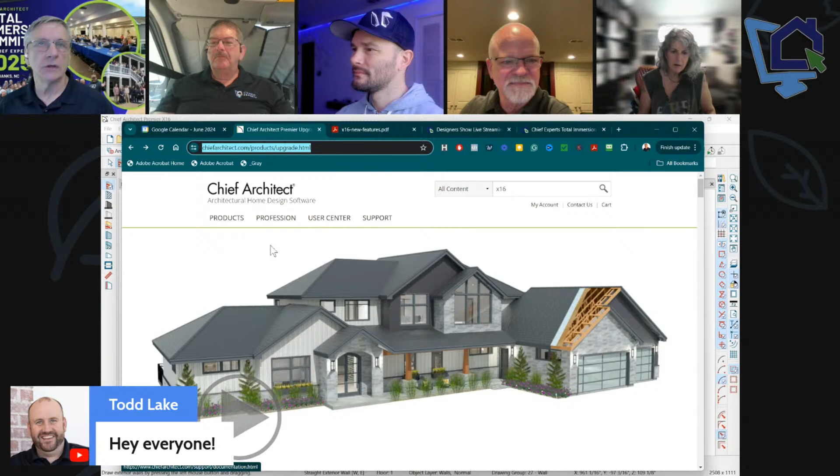And let's dive into this. So first of all, if you're on the show page, you'll see a link right below this video or this live stream where you can click to go to this page on Chief Architect's website, because you won't see this page yet on their homepage, not the X15 one, the X16. All you have to do is put in X16 up here in the search bar on Chief Architect's website, and you'll find the new features in X16 page.

And it's pretty typical, they do this every time. So you can scroll down this page, there's a little video at the top, it's a half-hour video that I think Takesha did, she always does a nice job on those. They go through it pretty quickly, so we're going to dive in a little bit deeper than that.

It's a good list, and there's some stuff that's really obvious what they've added. They've done some nice things here. Check this out, they always do a nice job putting this stuff together. Looks like they've even added little videos below these things, so this will be a place for you to come and find out more. But we're going to cover some of the highlights here today.

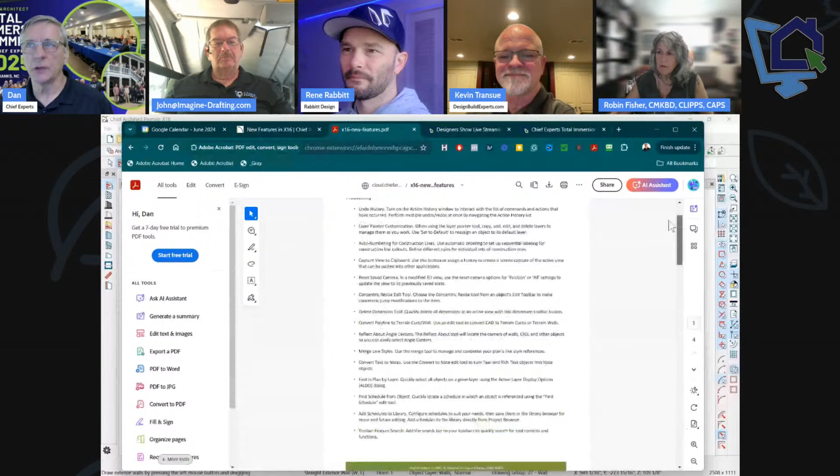The other thing you could do is right below this first item, you'll see a new features list. This is the PDF I've linked to that you can open, and it looks just like this. So here's your list of items in X16. It's 4 pages long. I've seen some of these come through with a lot more pages, so it seems like each version they're kind of tightening things up. Do you kind of see that, guys?

Of course, we won't get into the piss and moan session right now, as we always do when we get together, about how they didn't do this and they didn't do that. But they did a lot of good things, so that's what we're going to focus on here today. And they also do a lot of things they don't list, little bug fixes, little enhancements.

In our beta group, it's fun to try to find those little fixes and note what they did. They're tiny little things, but exactly, it feels like tightening it up. As I was going through this list, researching every piece they've listed here, I was finding lots of those little fixes too. We'll see some of those as we go through this.

So let's just start from the beginning. Undo history, what is that? I'm going to switch back and forth between that PDF and this. I've got a little plan started here that we can do some things with, and guys, feel free to chime in anytime you want.

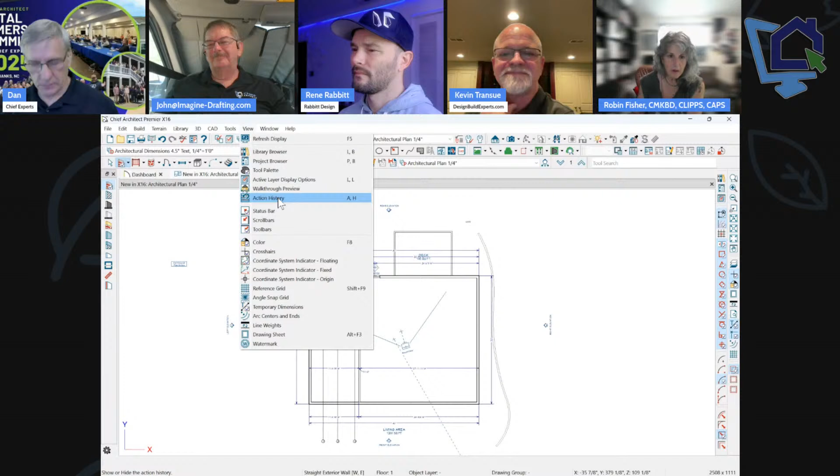It's under View, you've got a little thing here called Action History, and this is exactly what it says. When you perform an action, Chief is keeping a history of it. So you can open this sidebar, and as you do things in your plan, it's going to add it to the list, and you can just keep this list going and going. So this really becomes your undo list, if you want to go back to a point, like right here. So that sidebar is showing you what was just done, right?

You can't just delete that item, if there was that one thing you wanted to delete, and keep everything else? I don't know, I've never tried that. Everything above the thing you selected gets cancelled. Got it, okay, that makes sense.

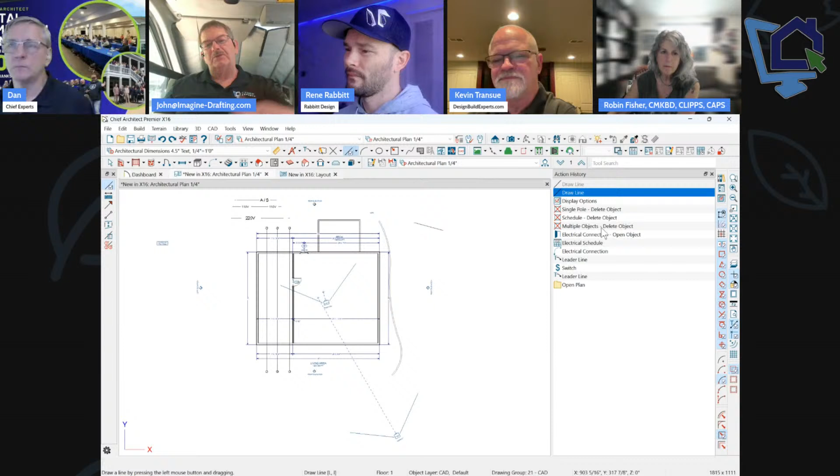And if you see that you selected something and went too far, you can go back up and select something higher, and it'll correct it to that point. The most current is at the top, the oldest is at the bottom. So if you click halfway down on there, Dan, everything above the line now is going to get deleted. But if you click on it again up higher, it'll restore things that are below it. Oh, that's actually really cool. Okay, so it's just moving things back and forward.

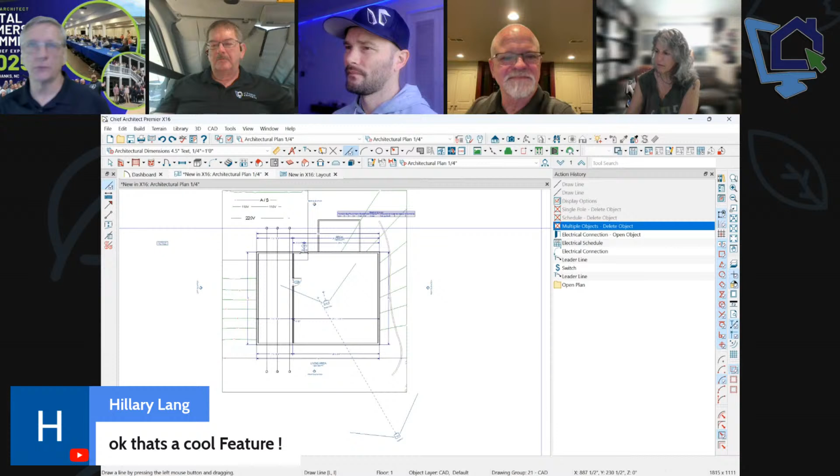I've noticed some things take a little longer than others. Well, think about how this works, it probably puts all of those in your memory and has to search through the memory of each of those. I don't know exactly how it works, but that's based on past experience. The thing about this, when you save and close your plan, the list goes away. It doesn't stay there forever, it's only there while you're working on your plan. So that's the action history list, and it works. That's kind of cool to see.

So let me ask you guys a question. You said if you go to a spot on the list, you delete everything above it? No, it doesn't delete it, it just undoes everything above it. It's just the undo function, right. You can't pick a single item to undo without affecting everything that happened afterward. So when I click this and hit undo, am I undoing just that item? No, you're undoing that and everything newer than that. When you click, you are performing that undo action.

But you can't. So it gives you a preview of what it's doing, what it's going to do if you keep going. You can't just undo the electrical connection. You have to undo everything that happened after that electrical connection, above it. So it's everything above it.

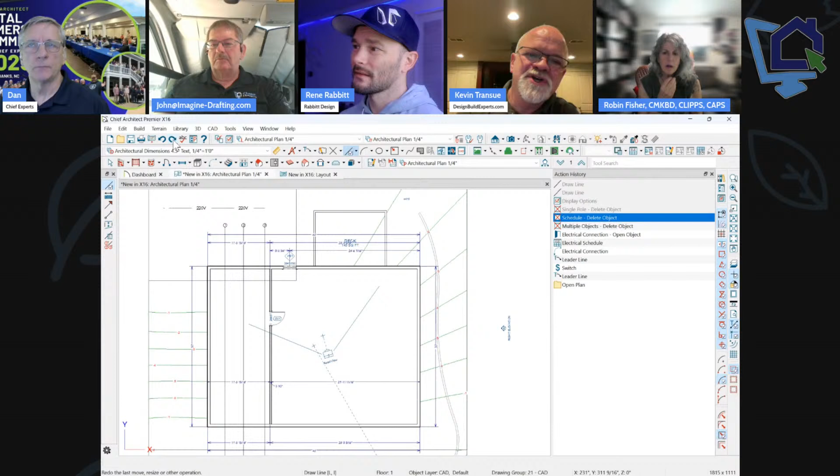Let's try something. Select what you have and then hit redo and see if it'll just go up one. Okay, yeah, oh there you go. That's really not doing anything other than selecting it. I know, it's like it's not undoing. Well, no, it's redoing. It's going up the stack, because you can watch it happening in the drawing.

Well, that's effectively doing exactly what we just said we probably couldn't do, right? Because it's taking the actions for each of those steps and redoing them on top of the action that was removed. Yeah, oh that's cool. I didn't know it.

Ethan, keep quiet, Ethan. This isn't a pissing and moaning session. Tuesday at 4 - I think if we go back to all hundred and however many of these sessions we've done, that's the first time one of our visitors has been called on the carpet. But it's Ethan, we can call it that anytime.

So, all right, let's move on here. Layer painter customization. So what is the layer painter, you might ask?

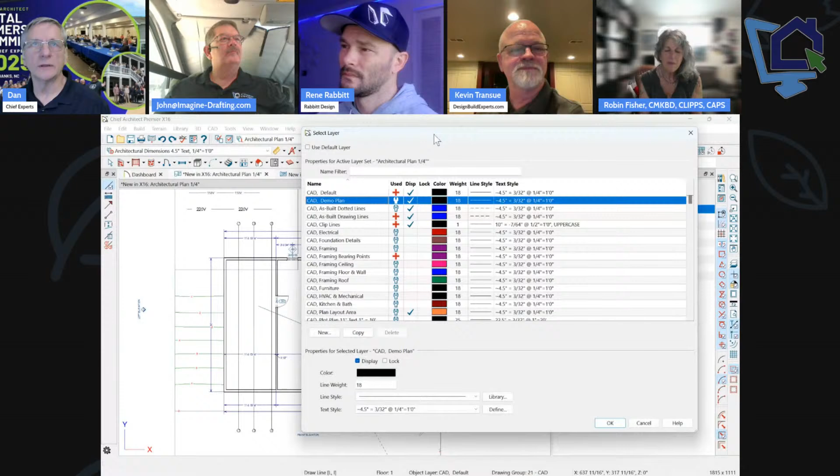I have that on my toolbar usually. I'm still using the Chief standard toolbar right now. Layer painter is under tools, layer setting, layer painter, and it is what it says it is. So what you could do is you can select a layer and paint it onto other items in your plan. Now in X15, we had none of this stuff.

This is not in this dialog in X15. All you could do is pick a layer. In this version now, you can not only pick a layer, but you can add a layer, change a layer, do whatever you want to the layer. And then once you select it, if I want to put something on a framing layer, I could click OK and then just paint things, and it's going to put it on that framing layer.

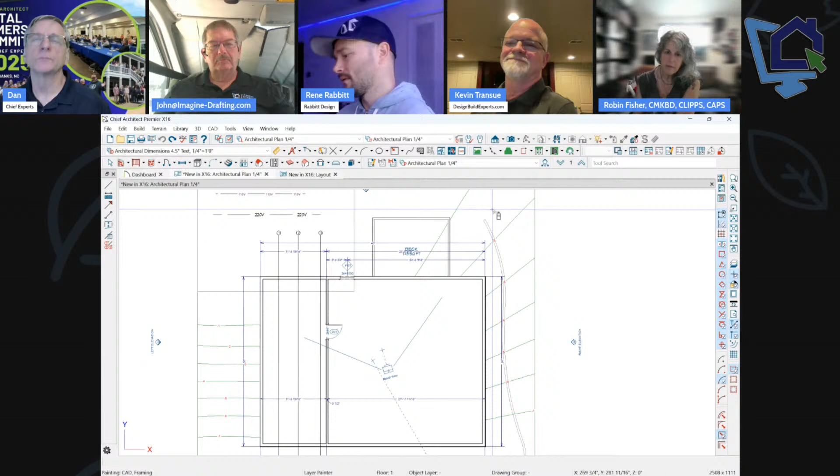So that's what that does. It's really a nice tool. Again, I usually add those to my custom toolbar. I'll give you a great use case - it just came up the other day. You've got fixtures, all kinds of fixtures, and then someone wants to make a plumbing connection plan. So they use the layer painter to paint just those fixtures that are supposed to be on some kind of unique plumbing fixture layer. And then they're just spraying the fixtures they needed on that plumbing plan. That's another place where I use that layer painter tool quite a bit.

In fact, let me change mine to my toolbar. So I actually have those tools on my custom toolbar - I'm not like Rene, I keep my custom toolbar pretty simple. That's about all I ever add to a toolbar: layer hider, layer painter, layer eyedropper.

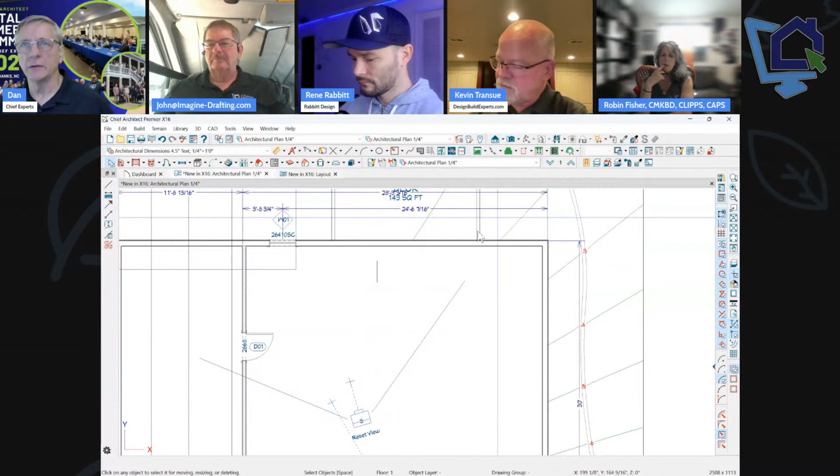So when I draw a CAD line that I'm dimensioning to, and I want that to be on the same layer as the dimension, I'm going to go layer eyedropper, pick my dimension, and paint it onto that line. So now that line is part of my dimensions because I've painted it on there. So that's just what Rene was talking about too. Very nice tool.

All right, so that's nice to be able to customize what it is you're going to spray on something. It's kind of like a material picker - you pick a material, you're going to spray it on things or click it onto things, I guess.

All right, next item was auto numbering for construction lines. You guys use construction lines? Yep, these things. Yeah, numbers. This is pretty cool what they've done.

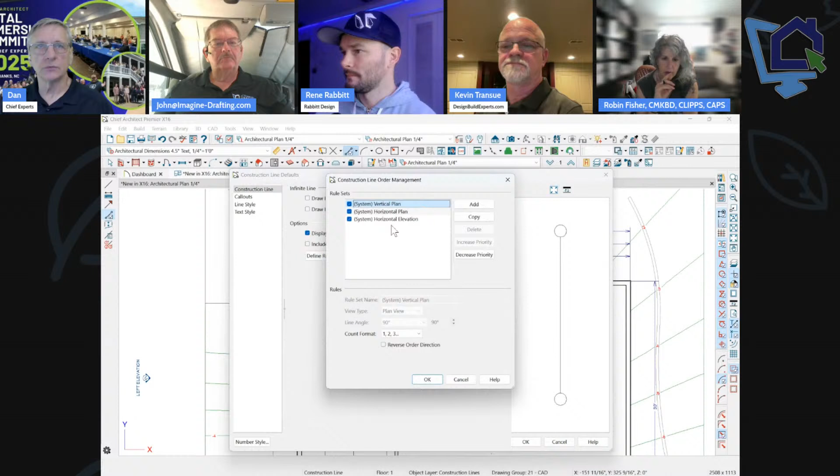So what you could do is you go to - let's see, double click under the line tool - is your construction line option right here. You could double click on that, or you could go to the layer icon, and you can then define and set some of the rules right there. So you want to define your rules. This is pretty cool. So they come with 3 rules already. You could add more if you want.

We want to go and change those verticals to ABC. You can change those, but what you want to do is include automatic ordering. That's what we want to do. And then for callouts, check that as automatic as well.

I wonder why it doesn't... well, actually this is my template, so maybe mine is set up automatic for that. Chief was already... did you use Chief's template? I don't know if the one that comes with Chief has it set up automatic or not, but anyway, you have to set those two settings to make it automatic.

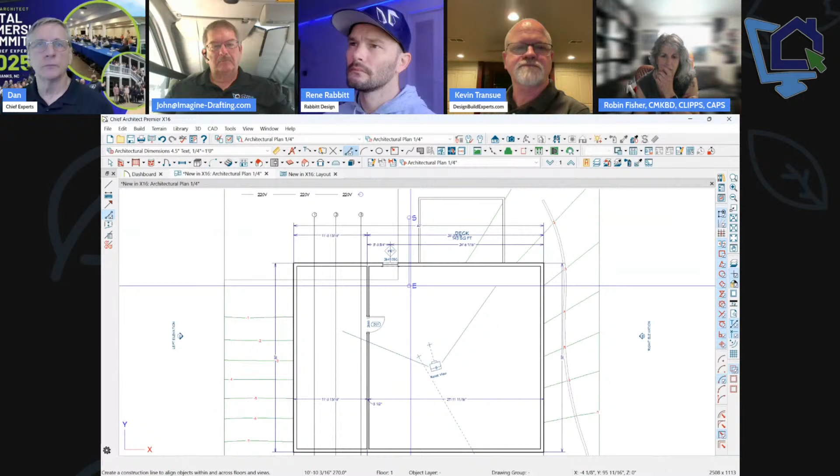And then when you bring that up in a cross section, that's what's pretty cool about these things. When we do our cross sections through here, we're going to see our construction lines where those cross sections are, which correlates to the floor plan. It can be a little confusing when the construction lines extend past the screen image, because the callouts will end up at the top and bottom of the screen or lay over the top of your drawing, which is crazy, but it's actually cool because you can always see the label no matter what you're doing. As you pan or zoom, they take their rightful positions where they belong.

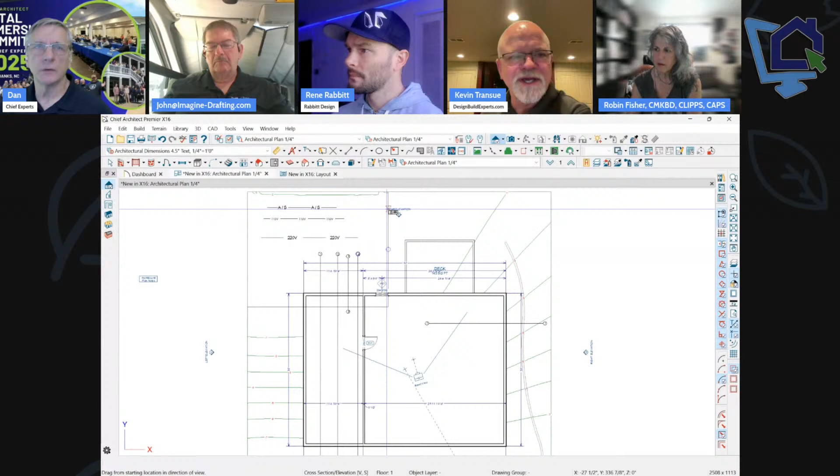Yeah. You guys use these a lot? I don't use them a lot. I do, when I need them. Yeah, when I need them, they're really nice. Now that they're automatically labeled, that would be even extra nice.

Okay, so this is an interior design question. I don't use them - why would I use them?

How do you use them? Oftentimes when I'm talking to a builder or a client and we're looking at the screen and they say move that door, and I go, what door? And it's in between grid line 1 and 2, and A and B. You can reference positions on your drawing to someone you're communicating with very easily. It's sort of like playing Battleship when you were a kid - you can just reference the position. That's a great one.

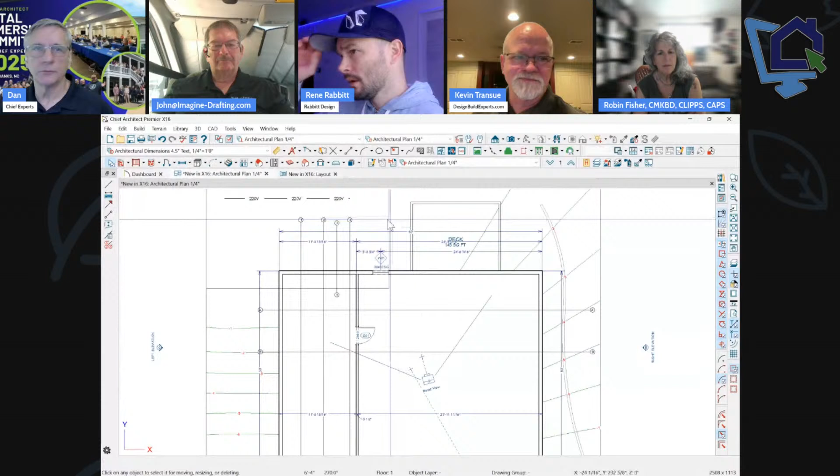I also use it to note bearing lines to my engineer - just makes it really easy, quick and simple. Part of it depends on the complexity of your plan. If you've got a super duper simple plan, no big deal. But in this kind of a case, you could take an elevation and say, yep, we're going to move that door between A and B in that elevation view. You could set up different standards for elevation than plan, although I'm not sure you'd want to. And then you can also set up standards for diagonal lines - new rule sets for diagonal lines too. Isn't it just 45 degrees? No, it's multiple different degrees. Oh, really? Okay.

Cool, Robin got removed - I don't know why. She didn't like our answer, huh? She got put in timeout. Sorry, I didn't even hear it - I had internet issues, so I didn't hear your answer, but I'll go back and listen later.

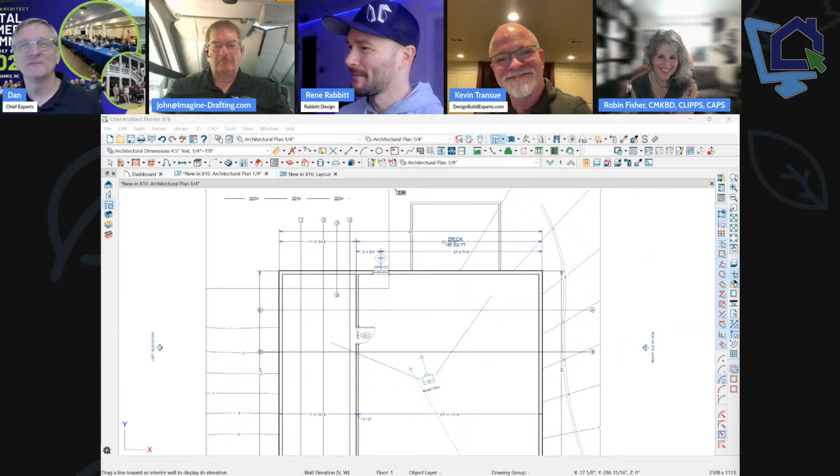All right, next up on our list was capture view to clipboard. This is kind of like, okay, well why would you want to do that? It's not even on any pulldown menu - I couldn't find it. Is it in the 3D menu? Capture the screen - if it is, I didn't see it. No, I have it on my toolbars now - you have to add it to your toolbar. If you wanted to add it to your toolbar, you would go to tools, toolbars and hotkeys, customize hotkeys and toolbars, then search for it.

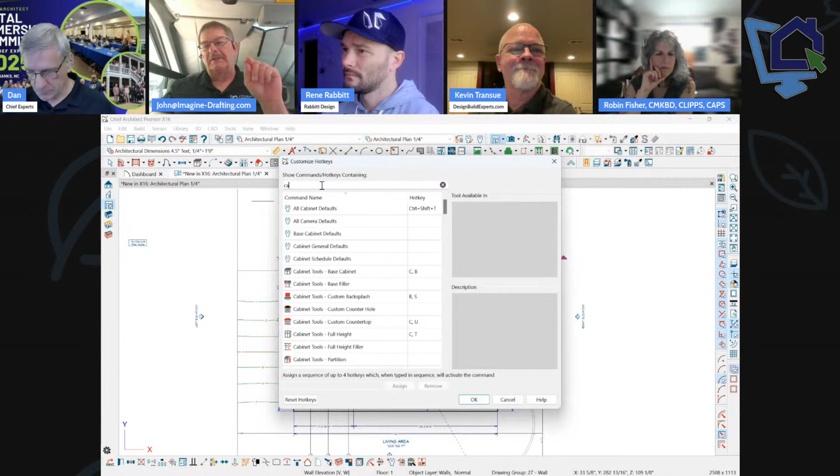Just a second, Norman. This is the answer to your question. Go ahead, Dan. And then I would add that to my toolbar.

Pull that up, you're under hotkeys. Wrong place, sorry - Tools, toolbar hotkeys, and customize toolbars. Now I would search for capture, and then pull this up onto my custom toolbar, right on top of the icons. And there it is, so now it's on my toolbar.

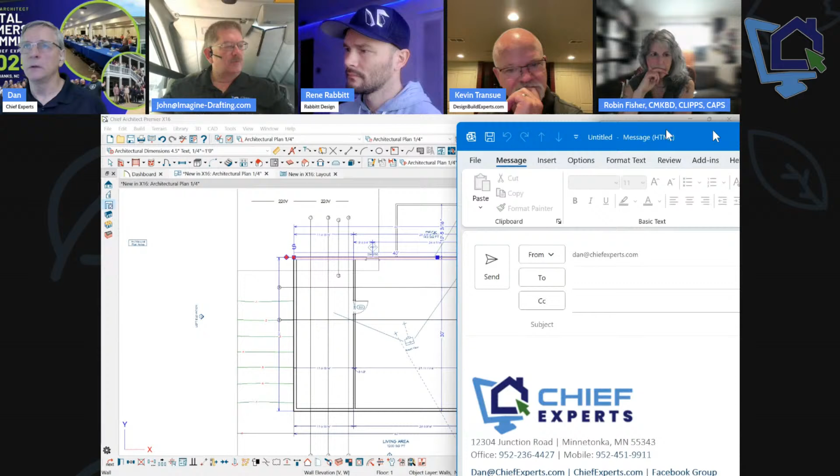So now when I click that, I can have things highlighted on my screen. The thing that's different than other screen captures is you're only capturing the actual screen of the drawing, not all the icons and everything else on your screen. And if you have stuff highlighted, you're capturing that. You could paste it in an email or a Word doc - I could just go to my email now and paste that screen capture right into there, and there you go.

I do find it funny that it includes the XY indicator. It sure does - well, I guess if you're looking at the plan, maybe you want to know what that is. As a point of reference, Dan, in a previous communication you said this is different from the way the Mac and PC work by default. The Mac does do this by default; I have no idea about PC because I don't have one. It just captures the screen, not all the icons and everything. Well, you can do it either way.

So can you try something for me? I haven't had a chance to try this yet. Can you open up a dialog for something - click on a wall or something, open the dialog, and see if that screen capture is still available? No, because I won't be able to click on it when there's a dialog open - I can't click on that icon now. Some kind of manual is needed, yeah, they need something for that.

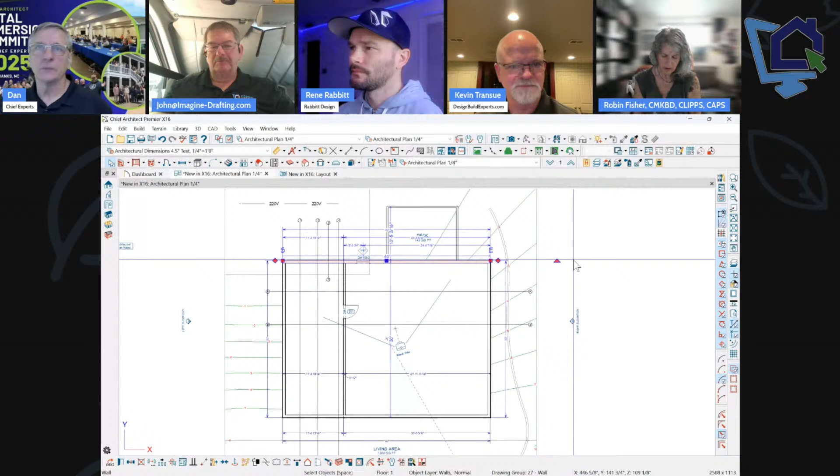So that's where you're going to use your Snagit or your print screen icon. You've got the print screen on your keyboard - you could click and that'll capture the whole screen. Print screen, or Windows Shift S.

Norman, go ahead - when you grab an icon and put it on your toolbar, you want to make sure you put it on top of another tool icon. Otherwise, you're going to create a separate toolbar, and you'll end up with all these little separate toolbars. So put it on top of something, and that way you'll have it in one big block of tools. Look, you see the dots in front of these different toolbars - when you set icons on top of icons, it adds it to that same toolbar, called a block of tools. It not only adds it to the same place, it adds it following the icon you clicked on - it's positioned in that toolbar right at that point.

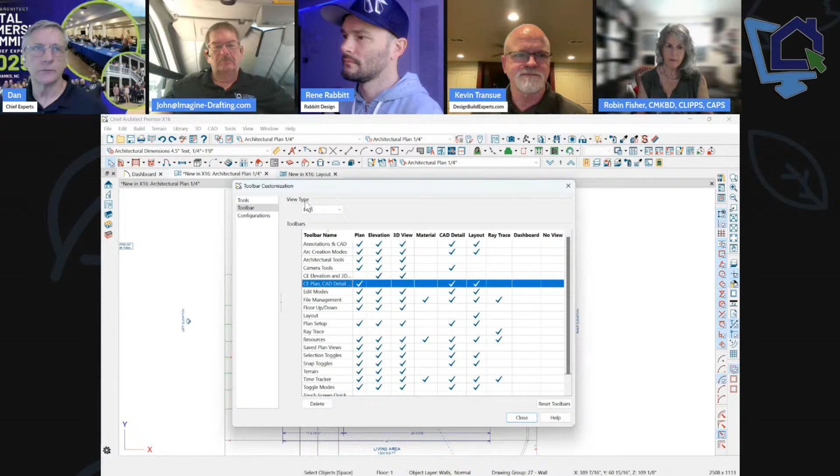And you don't need to only customize your custom toolbars - you can customize any toolbar, and take things out that you never use. What you can also do is, if you've created a little toolbar and want it on different views you work with - CAD details, floor plans, 3Ds, layout pages - you can turn those on and off on those different kinds of views. That's under the toolbar customization toolbar - that's what this whole chart's all about.

As long as we're still on that topic, if you are space constrained like me and work primarily on a MacBook or notebook, you can set up different tool configurations based on the type of work you're currently doing and swap between those. That's where that little chart comes in that Dan just showed, because something might be relevant to 3 or 4 of your different configurations but not the rest - so you can tell it this toolbar appears here, but not there.

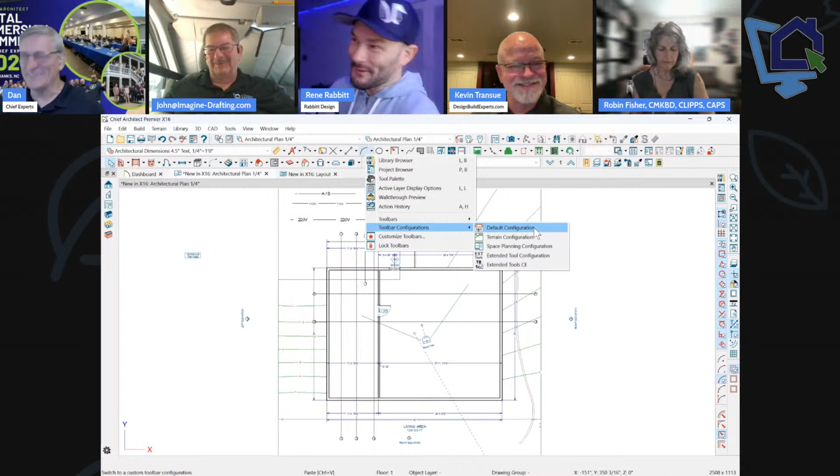And wouldn't it be nice if someone had ever made a suggestion that if you switch to your electrical saved plan view, it switched to an electrical toolbar configuration? Wouldn't that be nice? But come on, everyone here, go make that suggestion right now, please. Okay, all right, cool.

Notice I didn't say anything badly because it's a good suggestion. Let's go, everybody go vote on that one.

So when you right click on any icon, you can go to the toolbar configurations, and here they are. If you customize your toolbars, you can take a configuration, copy it, and then customize that one. So you could basically have a whole bunch of different toolbars that you could switch between.

And yes, it would be nice if you could tie that into your plan view, so that when you switch to a layer, when you switch to an electrical view, it brings up all your electrical items. That's a really great idea, Rene. Everybody get on that, will you?

Okay, we only got an hour. We got to keep moving here, guys.

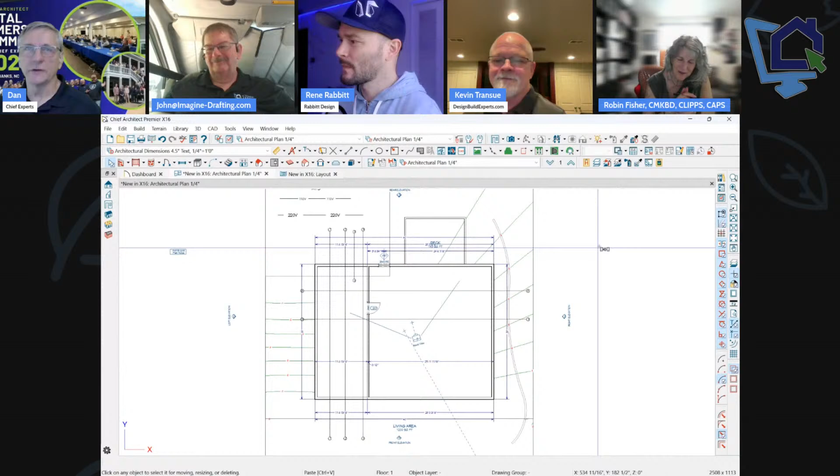Reset saved camera view. Have you ever gone to a layout page and double clicked on your view to open it, forgot it was on a layout page, and switched it around like this, and you go, oh dang it, now I have to go redo it on my layout page? I haven't done that since yesterday, but yeah.

But now, under the reset saved camera view, it's under the 3D menu, under view direction, and it says restore original view. It'll set it back to where it was before you made all those movements.

That's a good one. I like that one, because I do that all the time, just like Kevin was saying. You could do that in X15 too, if you didn't save the camera after you did it.

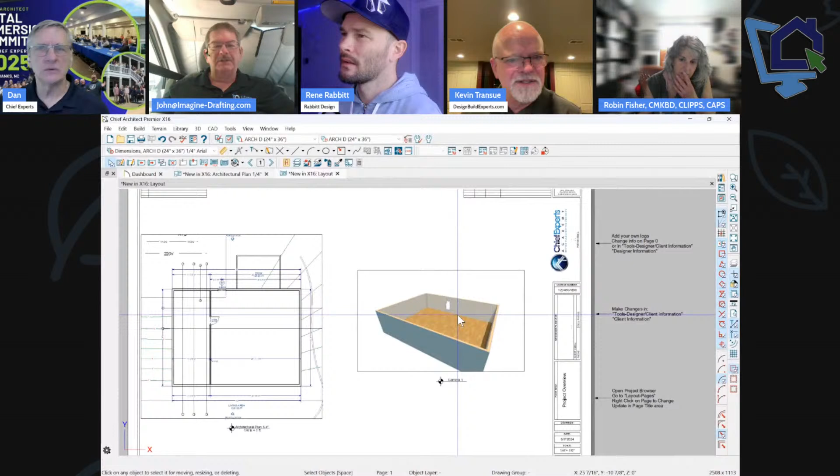Did it really not save that position? It wouldn't save that position. It would not even update on a layout. I'd never experienced that. I guess it never would really update on a layout until you saved it. I thought once I moved it, I was done.

Nope, that's the way it used to be. That's the way it used to be. Okay, anyway, that one's a nice little one. Reset, resize, or reset your saved camera views.

Concentric resize: if you have something that you need to resize concentrically, Chief has added that icon on the edit toolbar now. That's nice because we always had to click on this one and then open its dialog, but now this allows you to just click on it.

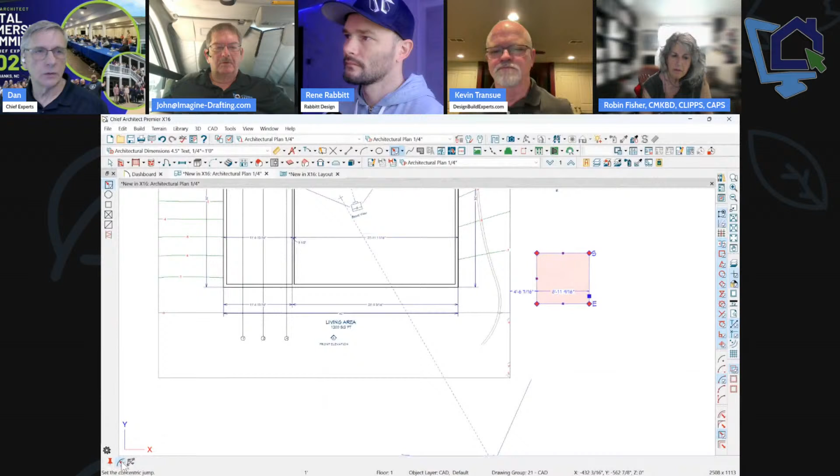Now I could just pull on it and resize it concentrically, or I could set a jump by clicking over here and setting the jump distance I want for my concentric resize. So when I do that and click on it, now it's jumping every 24 inches.

So you've got all of these other settings, actually where do they go? Now, when you're changing the jump distance, is that changing the entire plan's jump distance? So if you were to go concentrically resize a window, is it going to jump by 24 inches? I haven't checked that one yet.

Let's go find out. So if I click on a window and I'm grabbing this, yes. So it's the same as it used to be, where once you set that, you're going to have to go back and reset it back to 0.

This is one of my suggestions that they brought through, but I wish it was independent. It should be independent. It should just be part of this tool and not the whole darn program. And that stems from up here under your CAD, the general CAD.

Let's see, where do they actually put that again? No, I forget. Preferences, that's right, preferences, I forgot. That's part of this, yeah, right, you're here, there, yep, this jump distance.

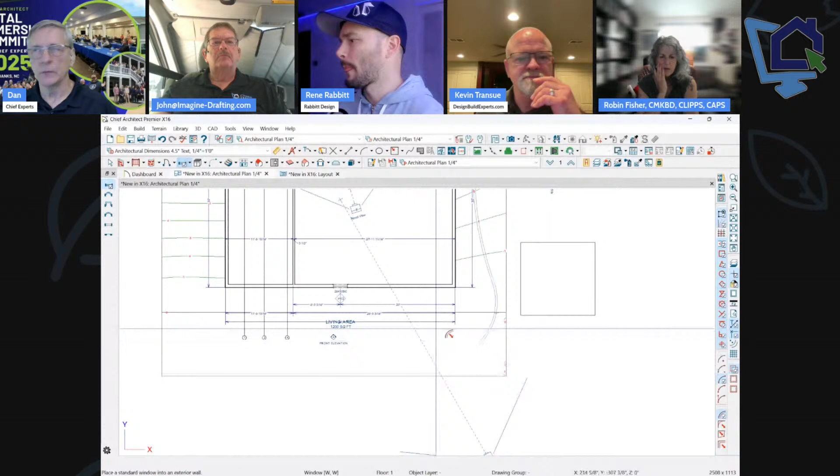So once you set it... that's interesting, it doesn't show 24 there. Did you change it to 0? I changed it back to 0. Okay, so it left it checked as concentric, so it's still doing it.

So if I move that window now, yeah, see, that's not what it's supposed to do. It's only supposed to move an edge. So you actually have to go back in here. You can't even turn it off here. So now how do we go turn the concentric off?

It goes off automatically, doesn't it? It didn't, no, it stays attached. It did not. It's set to 0, but when I resize that window, it's still resizing concentrically.

Now you got to go back to the edit menu. So now you actually have to go back to this one, or maybe it's because I have that one selected. That's probably why it's doing it. Yeah, it was operator error.

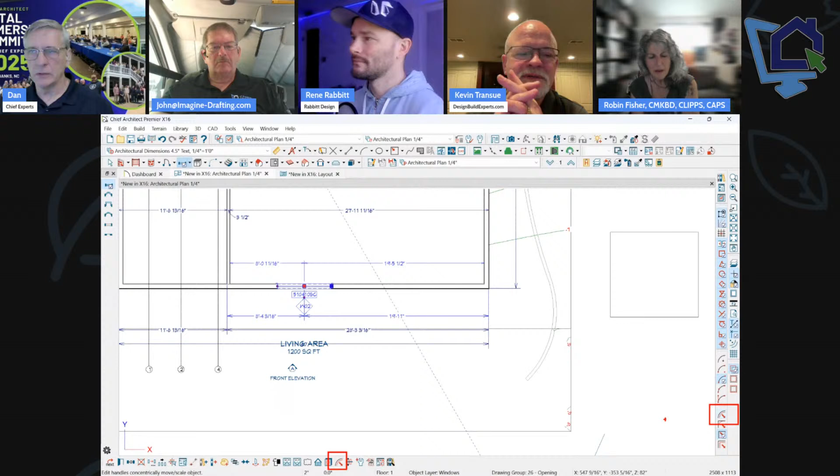So at least this has been detached from this, so if I'm doing it from here, it's not keeping it locked on concentric. Mike brings up something that I do, which is: will you concentrically resize that window again without a jump distance? Oh okay, set it to 0.

Hold your C key, or comma, in this instance. Let go of the C or comma and then hit tab or enter while you're dragging. Start concentrically resizing this.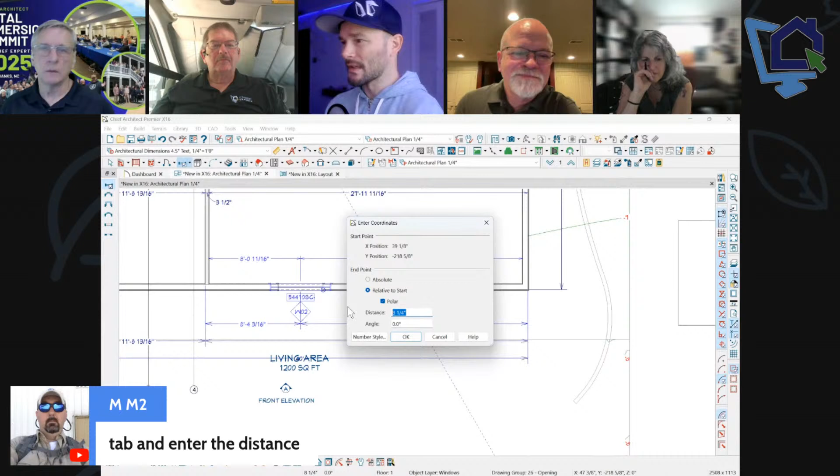Now let go of the concentric, but don't let go of that. Check polar and then set this to 6 inches. Now we've resized the whole window. You've completely forgotten why you were resizing the window, but you got it resized. That's what I do, same thing Mike does.

Okay, let's move on. Delete dimension tool. This little icon right here will delete all your dimensions for the plan view you're on right now.

If you have auto dimensions turned on, it's going to turn it off for all of your plan views. Why all of them? Why not just the one I'm on? Now I'm complaining a little bit, but anyway, I'll have to click yes, and now I don't have any auto dimensioning going on. I'll have to reset that, which is fine.

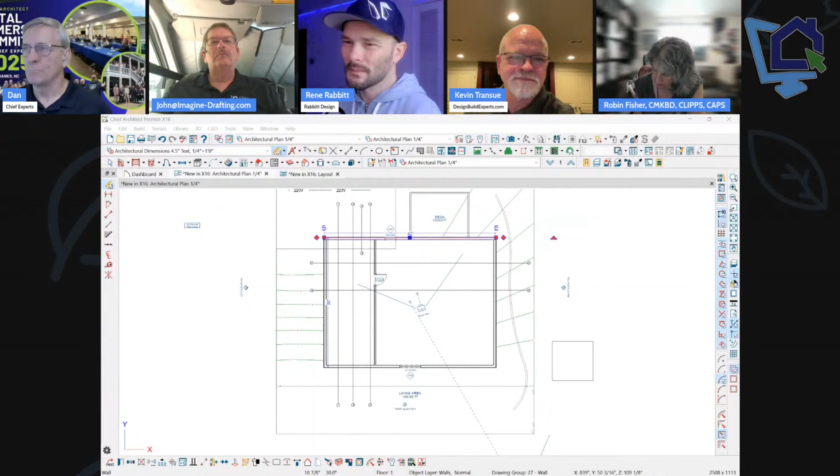The other way to do that, which I've always taught for years, is to highlight any ruler icon and draw a marquee and then hit delete. Same kind of deal, but now we have an icon to delete all our dimensions. It's really great if you're just working through some templating or setting up dimension defaults.

It's very helpful. Does it delete all dimensions or just those currently shown? Good question. They'll still be there for your other plan views. So if I have dimensions here in this plan view and I go back to this plan view and hit delete dimensions, it will only delete the dimensions for that plan view.

Even if they're auto dimensions? Because you made a comment that if they were auto dimensions, it deletes everything from all your drawings. Did it delete all of them? Well, you said that comment. Okay, so I got some on my half inch. Oh, that's because these are on the same layer, probably.

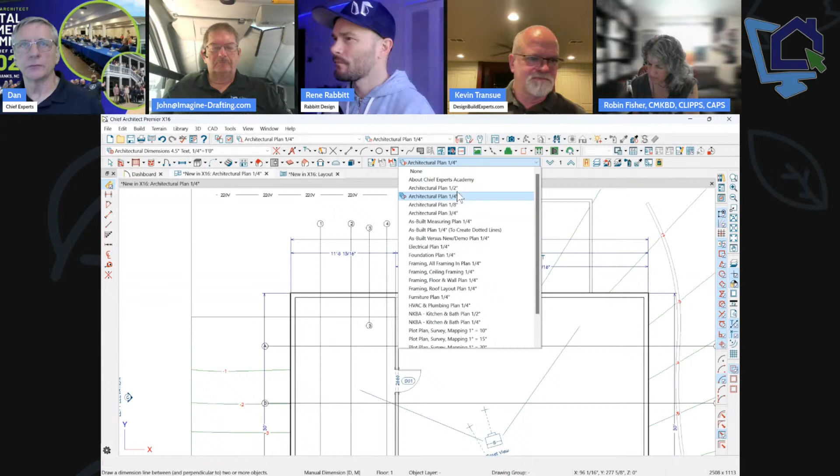Let's go to my electrical plan and add some, and now let's go delete these. Go back to that. Okay, yeah, just the plan view you're on. That's the way I have my template set up. These are all using the same layer, so that's why that did that.

Convert polyline to terrain, curb, or wall. That's one of the tools they've added. So if you draw a line somewhere and make an arc, make it whatever you want, you can convert that now using the Magic Wand tool, the convert tool, to whatever you want. Notice they've changed this dialog a fair amount, so it's more scrolly-poly, and I'd assume that's because they're going to add more things to it.

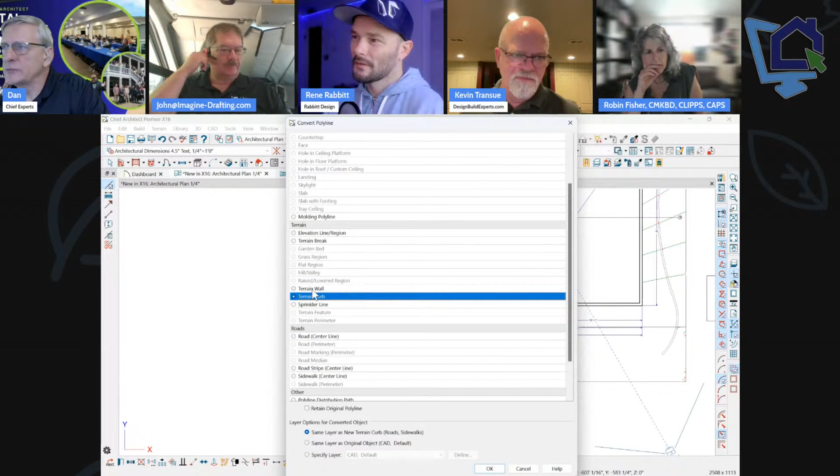But we have our whole terrain. It's nice they've broken it down a little better. I could make that a terrain wall or terrain curb and have it follow the terrain. I haven't played with the terrain wall thing much. Have you done that? Will you do it? I'll show you a trick on this that I like. So do the terrain. Oh sure, I did the terrain curb.

Convert this back to plain polyline.

Okay, so we'll go back here and click on this tool and select plain polyline. They got rid of the icon that switches it to plain polyline, so now you have to just go in here and click OK. Now it's a plain polyline again, so press OK.

So here's what I like. Notice now it's a square, a rectangle. So you can take a single line, make a really organic shape, and if you needed it to be a closed rectangle of some size, you could convert it to a terrain wall, then convert it back. That's the same kind of deal. So once it's converted, if you needed to model something that was a solid with an edge like that, this is a really fast way of doing it.

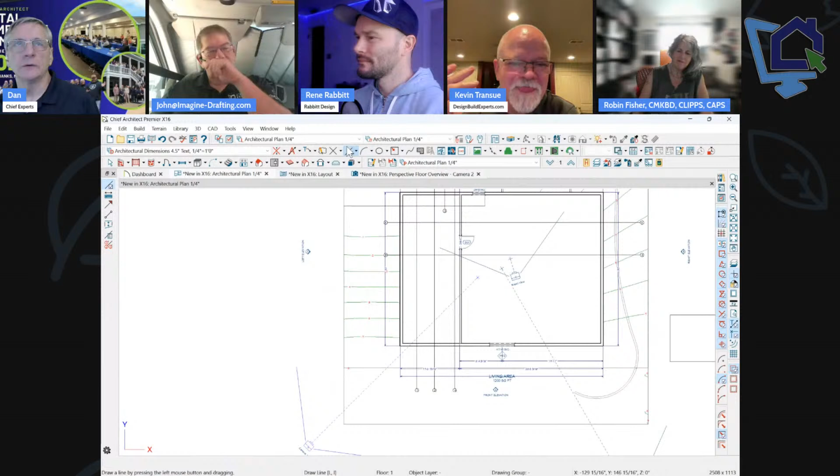Or you could use it to do what it's supposed to do, which is make a terrain curb. But I haven't played with the terrain wall function that much, so that's a really great idea. If you're taking a line and breaking it and doing all sorts of crazy stuff with it—again, I'm just holding my right mouse button down to bend it like this—then I convert that to a wall or a curb.

Going to make it into a box, and make the width huge or something. Yeah, I could make the width bigger if I wanted to. And now, if that's the shape I need it to be for something else in my plan, I just make it back into a plain line.

Or you could even convert it to solid right from here. That's cool. I could convert it to any of the things that are highlighted there. But there you go, so that's pretty cool.

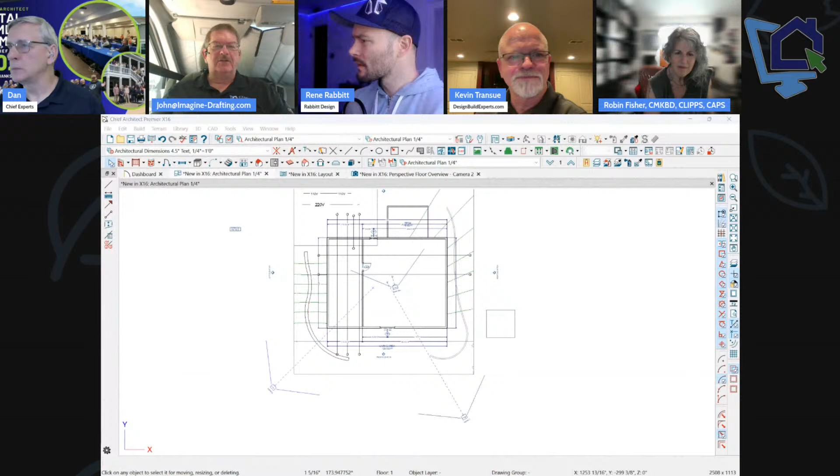Did anybody else catch that technical term that Dan just created? Yeah, I did—besides me and Norman? I'm glad Norman pulled that up because I was at 'roly-poly.' Roly-poly, yeah. That's like my term for refreshing the 3D. You got to jiggle something.

Brady says, where is the clipboard things are sent to? That's your system's clipboard, Mac OS or PC. Hey Mark, what's the keystroke to see that hierarchy or list of things on a PC? If you turned clipboard history on, then it's the Windows button plus V as in Victor.

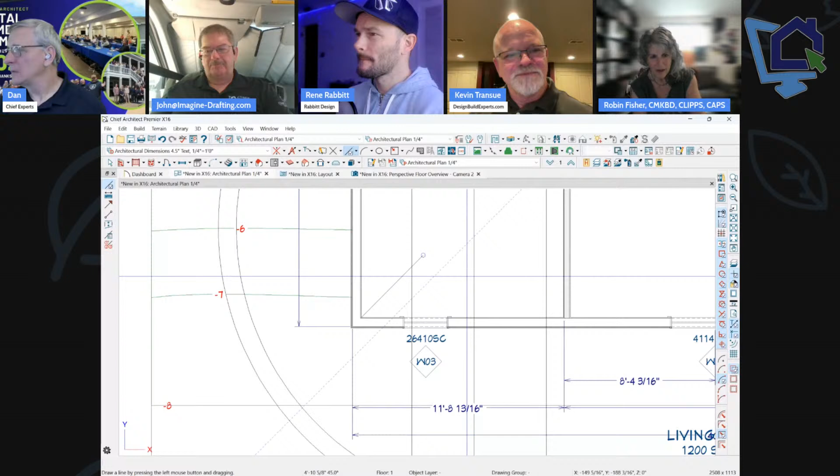Okay, so whenever I wanted to reflect something about an angle, I always had to draw a CAD line. Oh, this is my favorite one. All of them. And I could hit my reflect—I could hit copy and reflect about, and then I could click on that line. Well, we don't need the line anymore.

So Chief has made it so that they're going to snap to that corner. So I could hit copy, and now I could hit reflect. Now I could just click on that corner, and I get my reflect without drawing that line. So it saves me a step—that's kind of cool.

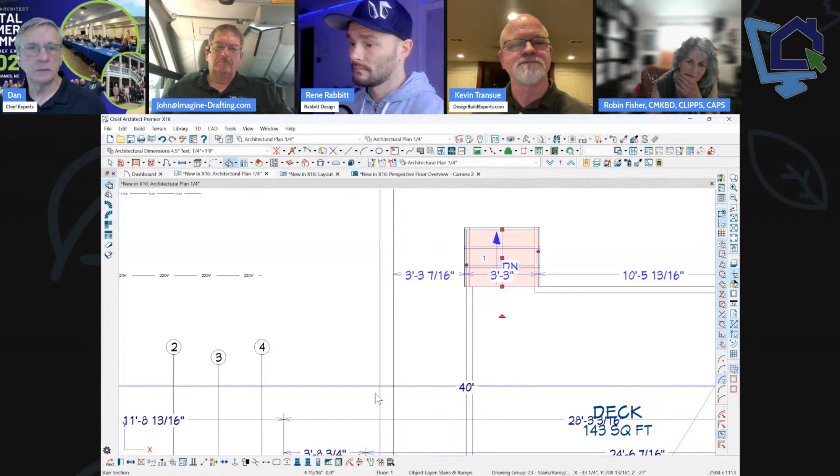So if you're doing steps on the edge, that's what you want to have. I'm going to snap that to the corner of my deck, and then I'm going to click copy, reflect that around, get on that corner. Come on, it's really touchy though—sometimes I might have to draw a line if I'm away from this corner. Yeah, pull your stairs—there you go, there it is, so there I got it. So you've got to get on the corner.

Can I share mine real quick? Yeah, go ahead, I'll show why I love this one so much. So here we go, I'm in 3D view—I like to work in 3D view a lot. So I've got a roof plane here, just a single roof plane, and it's easy for me to copy, reflect about, pick that corner up. You have to be a little bit precise with it.

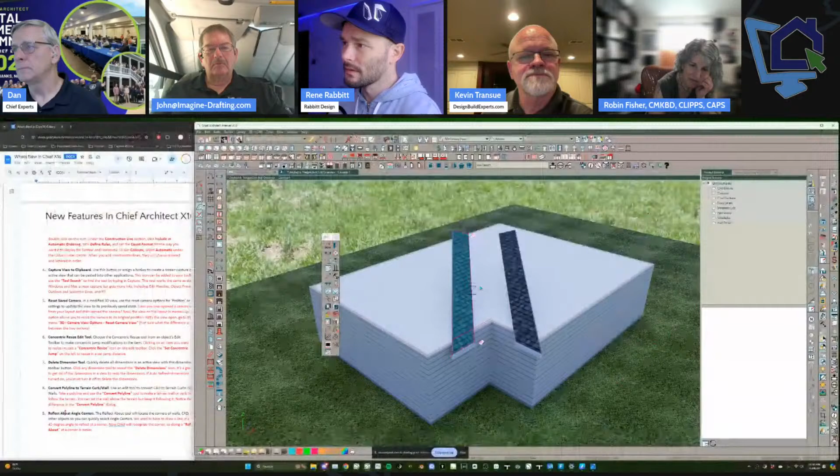So that's a little finicky, but once you've got that, then I can use the join roof planes tool and join these two. Done, right? Look at that—you don't need to be perfect, right? So it can just keep coming around this corner like this, do that same thing, make sure the selected edge handle is this one, join the two roof planes. Look at you guys, that's worth the price of admission right there.

Yeah, jeez, so you're just building that roof out real fast. That's such a big one to me. Yeah, I use reflect a lot. That's going to save me a few extra minutes not having to draw lines. But yeah, reflect is one of those really, really nice tools in Chief.

Reflect about—all right, on CAD boxes too. CAD, yeah, boxes. I mean, it should work on anything, anything that's got a corner on it, right? Yes.

It's fabulous. I've been using that. It makes life a lot easier.

All right, merge line styles. We're up to number 10 out of 50. We're not going very fast, we're going to have to do another show, but we're covering a lot of great stuff. The fun thing I like about what we do is we talk about alternative ways to do things and use things, and some reasoning why you need it and why you don't. I really enjoy that part of our conversations.

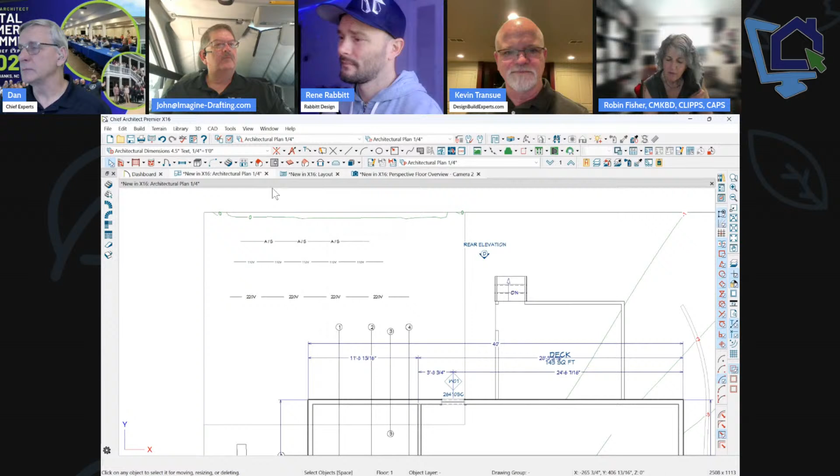The next thing is merge line styles. I don't know why I would ever use this, but maybe Rene has, or one of you guys has a reason why. Say you have some different line styles and you want to merge them into one line style. I don't even know what that means. Well, you can go to your CAD tools, go to lines, and there's a line style management tool.

What Chief will do is you could click the used icon here. That'll sort your list out, and you can see the lines that you've used in your plan. So let's say, you know what, I just want all those to be one line style, so I'm just going to merge those all together, like merging layers. Now those will all be the same line style.

How did it pick which one it was going to? It was probably on the top of the list. So let's go look at that real quick. Do your do action, CAD, lines, line style management, sort by that. I don't know that I can move them, but yeah, that was the one on the top of the list.

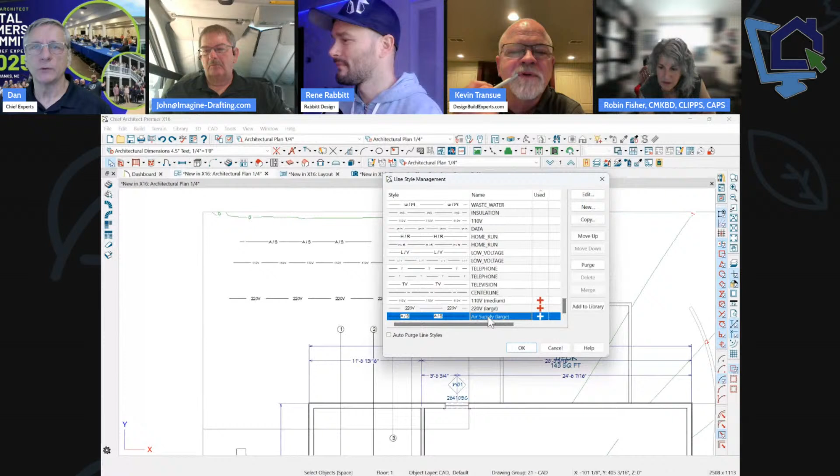Move something. Oh, move something. Completely changed the sort order. You dropped them down. So let's try this, let's see if it converts it to the center line. If I merge them... yeah, it did. Looks like it did, so whatever's on the top of the list.

I want 220 volt center lines. Well, go ahead, I think we should mix the water and the electric ones together. Yeah, and water and gas, gas and electric would be a good mix. I wish I could merge Kevin and Robin together.

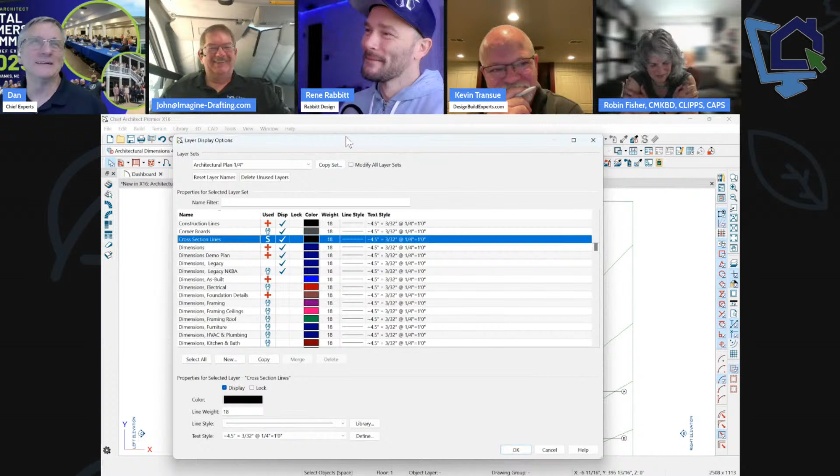I didn't see this on the list, but they did add this. Was this an X16? The ability to merge layers? No, that's in previous versions. It was. Okay, that's why I didn't see it on the list then. I guess I'd never really noticed it before.

So if you have things on different layers and you want to put them on one layer, you could select them and merge them into one. That's really great if you happen to have made copies of the same thing and your lines are on the same line and you're like, oh, what a mess. Yeah, it's an easy way to clean up your things.

The next one's really a good one. Let's skip the next one and go to 12, then we'll come back to 11. Let me do something here, same topic. Let me turn off all these goofy lines I have on my plan. Wait, you're gonna mix? Okay, you're gonna work on that. Okay, yeah, all right, I got it.

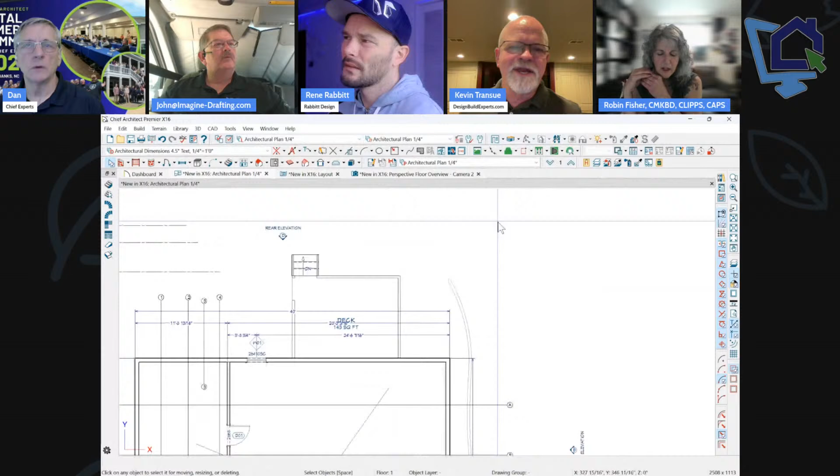So whenever you type text in your plan... no, we're gonna skip that one. Go to the next one, and then we'll come back. What, find in plan by layer? Yeah, because it's kind of in that same realm.

Oh okay, sorry. So if I go to my layers, actually I have to use the side panel for this because I didn't see that in that panel. So if I go to my layers over here and turn on all my tools, unless I'm missing something, I didn't find that item there. So if I go to display and I search, look for the plus sign, to be used if you...

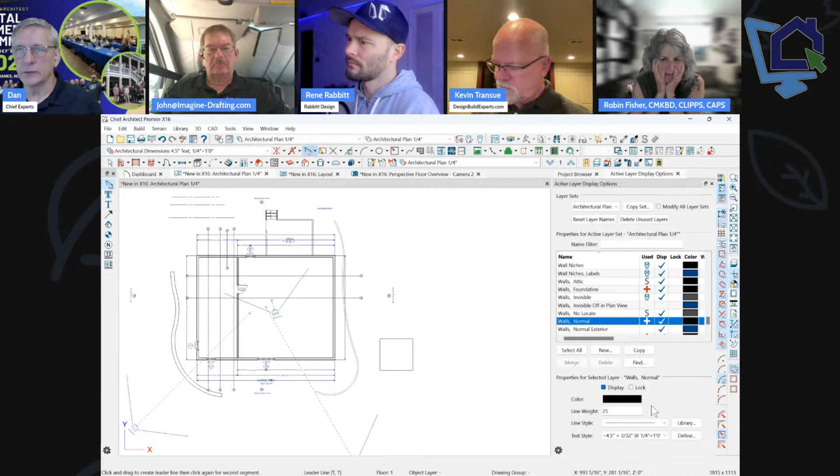Yeah, so let's just do it like this. Let's go to my names, let's go to my walls. So I've got a bunch of walls. Walls normal, where'd they go? Okay, so I could find all those walls on that layer in my plan. And which plan?

The floor, hit select, now I've just selected all the items on that layer. If you've got some custom layer you can't delete and don't know why, and you're trying to find it, and it's hidden inside of a CAD block that's inside of a CAD block, this will find it.

That's really wonderful. I'm curious why they didn't put that on this menu here too. Oh yeah, they didn't put it in the layer display options. Yeah, they must have forgotten about it here. It's only in Active Layer Display Options, only in the right side panel. Yeah, I do like that one.

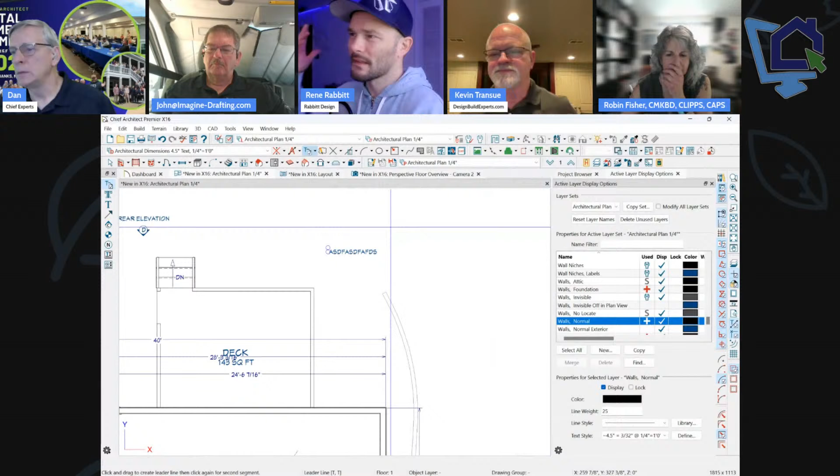I'm just looking down. I now have some legacy CAD blocks that hide these custom layers I used to use all the time, and it's hard to purge those.

Robin, you were going to say something? Yeah, well I was just looking down, and we can add schedules to a library now. Oh my God, now I'm really happy.

You're jumping ahead on us. Come on, I know I am. I'm sorry, you're a schedule freak, but that's okay. I am a schedule freak. We'll get to that at some point. Yes, that is a really cool feature that you can create your own custom schedules out in the library and use them anytime you want.

Yeah, but converting the text to notes, this is amazing, this is fabulous. So you could select one item or a group of items, and you have a little icon down here now, a little magic wand thing. It's going to convert whatever text you've selected into a note that you can put on a note schedule. So you could pick out your schedule.

If you don't have one made, you'd have to make it first. We don't have the option to add a schedule here. So if these are all my as-built notes and I click OK, now they're all the same because they're all the same. Let me go add something different.

And then I could convert that to a note as well. I'll do the same thing, as-built notes, that should be number 2 now. And now you notice I don't have a schedule anywhere. So when I click on one of these notes, it's going to allow me to go create a note schedule for that item.

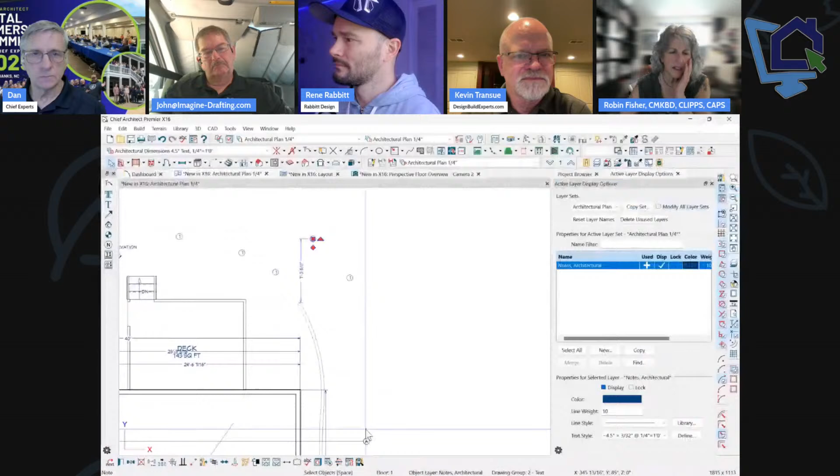And that's where you can customize it, that's where you can create your new schedule. Right, so that's where you can now call it your as-built notes. So there's my as-built note schedule now to go with those things.

And I can put this anywhere in a CAD detail, anywhere I want in my plan. But you can change it too, so can you go to that then and change that note schedule to a new schedule?

No, it's not going to let you create a new schedule at that point. You have to go and create the schedule name first if it's a new schedule. Yeah, it won't be on this list. Oops, actually I've created... I'd have to create a new thing, but yeah, that's the idea.

Yeah, but that's fabulous, especially for people like me, on my as-built plans I write all my notes on it. Yeah, and it's done, that's great.

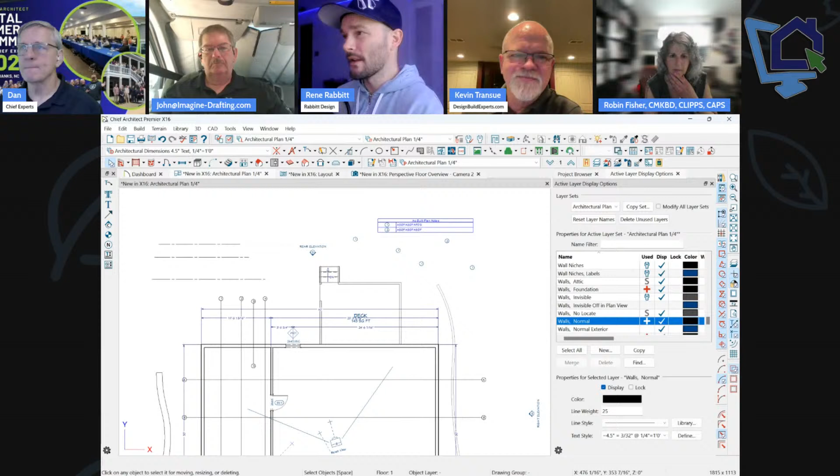That's fabulous. Well, they announced this feature in Coeur d'Alene when we were there, which by the way I think most of us are going again this year. If you haven't signed up, everybody on this call will be there. Yeah, they're running out of seats real quick on that. So if you don't know about that event, that's the event at Chief Architect.

But they announced this, and I remember Kevin almost jumping out of his seat. Yeah, this is something I've been excited about for a long time because I capture all of my scope of work in the drawing I'm presenting to the client as individual comments. So this now allows me to create a scope of work, effectively a schedule, that becomes the scope of work I can turn into a document to give to my clients and have them sign off on.

See, they don't always do bad stuff. They do things that get you excited too.

Come on, yeah absolutely. So if you wanted to add that text back to your plan, you would just open up the note, copy it, and paste it back into a text box. Or could I convert this back to plain old text? No, you can't.

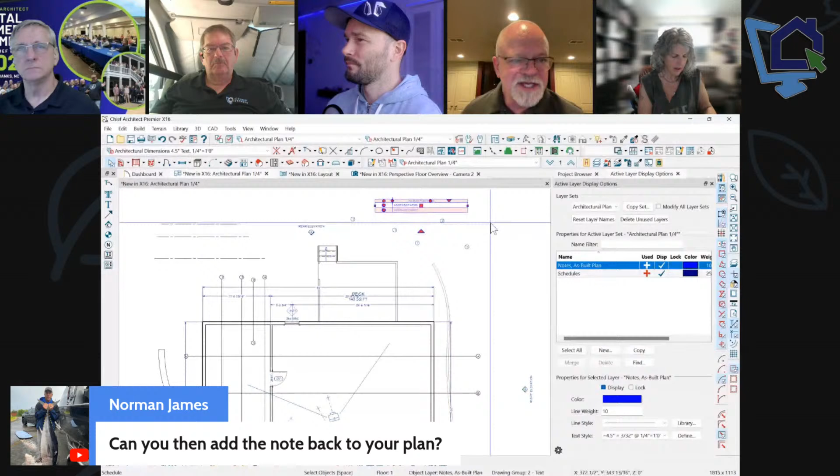But I could convert my schedule to a plain text box. Well, take it back from the start. You can also take all of those text boxes that you created, simply copy them in place and put them on a different layer, and now you can convert that one. Or if you forgot to do that, you could use action history to go back. That's a good one.

This next one's huge for me because I keep my schedules in a CAD detail, and being able to get them super fast. Find in plan by layer.

No, we did that one. Find schedule from an object. So if I click on a window and I want to find my window schedule, I can do that now by clicking this icon right here, the little magnifying glass with the word schedule on it, and that will go to that schedule and open it. So you can have that anywhere in your plan. It doesn't matter. I keep mine in my CAD detail windows, so that allows me to go find it really quickly.

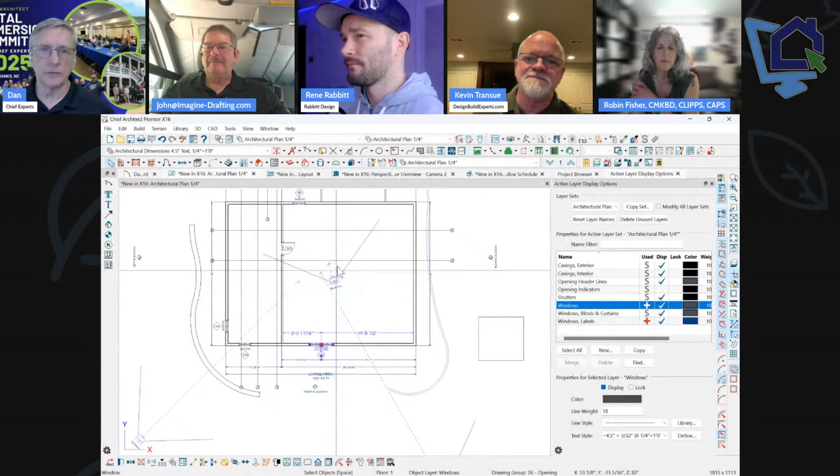And I love how you can find things from the schedule on your plan. So if I wanted to find that window, I just click on it, and then I could open the dialog for that item on the schedule, or I could find it in my plan by clicking this little magnifying glass, and that will take me to that item or those items in my plan. So they really made it easy to switch back and forth to whatever you want there. I really like that a lot.

Can I do a little sidebar and show a trick? Go for it. Let me get Chief out.

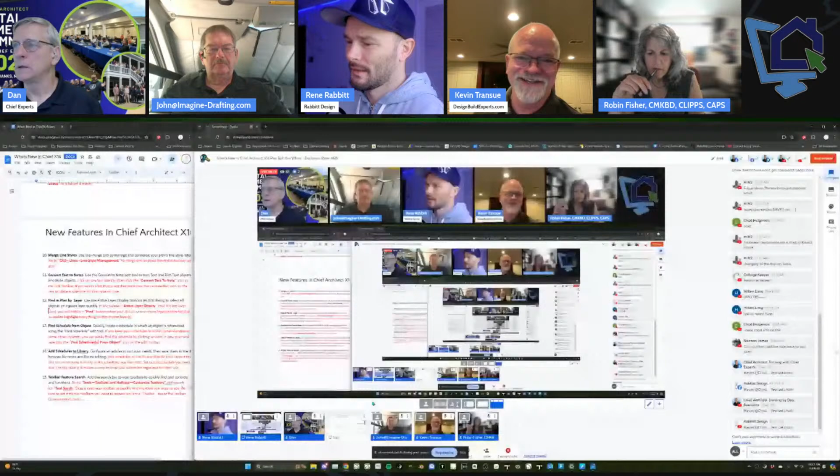So in case anyone didn't know, I keep all my stuff in CAD details all the time. And you know what, you're going to have to take it back from me. My mouse just died. What now? My mouse just died. So, back. Time to get your batteries out. You can remove me for a second.

I think we should just have a reference in these sessions we just call the rabbit trail, because... mind if I have a little sidebar and show you something you were not expecting? Yes, I love those. I love how Rene does that. We'll be back. He'll be back.

Add schedules to libraries. Add schedules to libraries. Just like it says, you can click on any schedule now and you'll see the little book icon to add that schedule to your library. You can have unlimited schedules in your library, different layouts, different types that you could add to your plan.

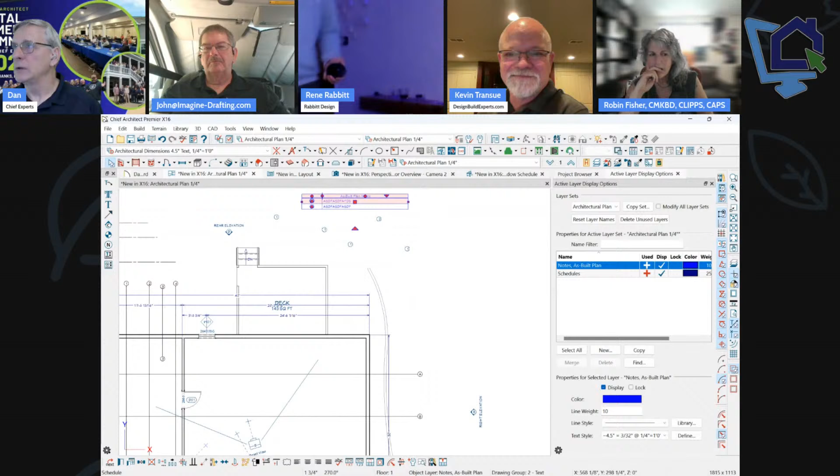Now, you can't add the same window schedule to your plan more than once, or you're going to get double lettering, unless Rene has some magic trick for that. Well, you just have to divide it by floor or layer. You could do that, right? But having that then takes... because I keep all my schedules and they're all separated in CAD details, it'll be nicer having them in your schedule in your library.

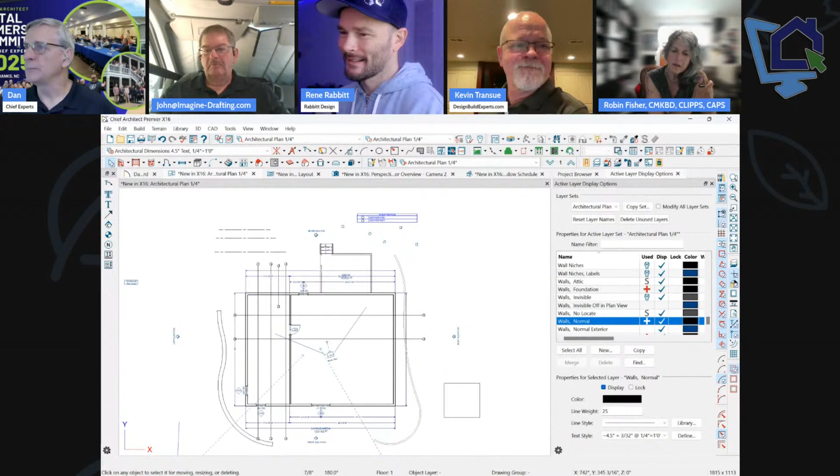All right, can I show that trick real quick? Go for it. Will you add me to stage?

So if we just drop in a call out anywhere, in the call out label I'm going to put in object specific, and I'm going to say linked view call out label. And I'm also going to switch this to like a rectangle or a capsule or something. Once I have that, I can just put it off to the side. In our edit toolbar, we can link that view. I'm going to link it to some CAD detail that I'm working on consistently, or I want access to, so I'm going to link it to a CAD detail.

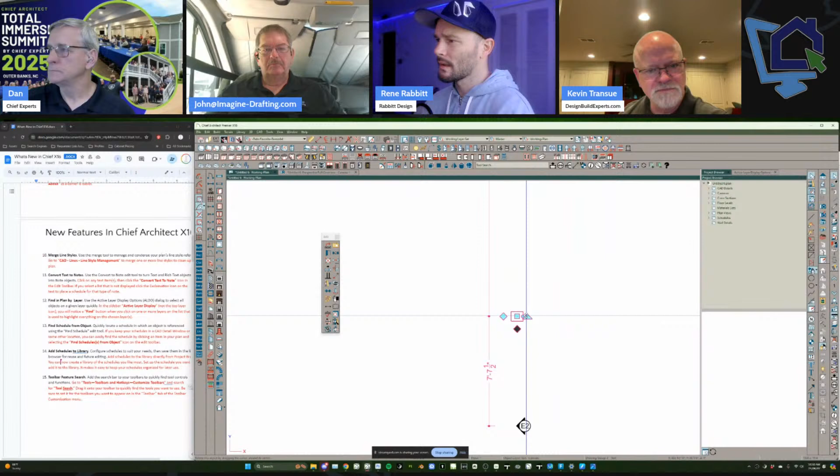Let's see, I must have gotten the link name wrong because it's not showing up. Linked view call out label. Linked view, linked view layout page label, linked view name. There it is, sorry, linked view name.

So this is telling me what it's linked to, and this is a call out. So I'm working on my plan, and I want to get back to that CAD detail very quickly without even having to think about going through my project browser and searching through a bunch of CAD details. I can just double click this call out and it's going to take me right to that CAD detail. Nice, that's beautiful. Quick little tip there.

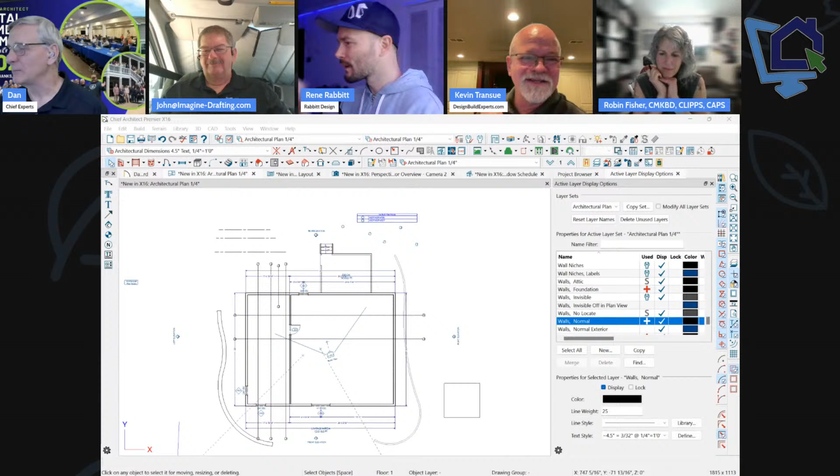It just takes me a few years to get some things down here. What am I doing here? I'm back in my plan and I'm looking for my list. Where'd it go? Here we are. So we're up to number 15, add schedule to library. We're going to have a couple more shows.

Okay, Chief added a little tool called Toolbar Feature Search, which is pretty cool, because I think there's over 1,300 icons now, or there's really close to 1,300 icons. And sometimes you just don't know where they are.

So what we could do here is we could go customize our toolbar, and we could go to tools and find the, which one is it? It's customize, just search for search. No, that's not it. What am I looking for? Toolbars customize. Is that right? Toolbar, no, what am I looking for? Did you call it Toolbar yet? It's hard to find. Oh, toolbar, thank you. If I could spell, we'd be in great shape.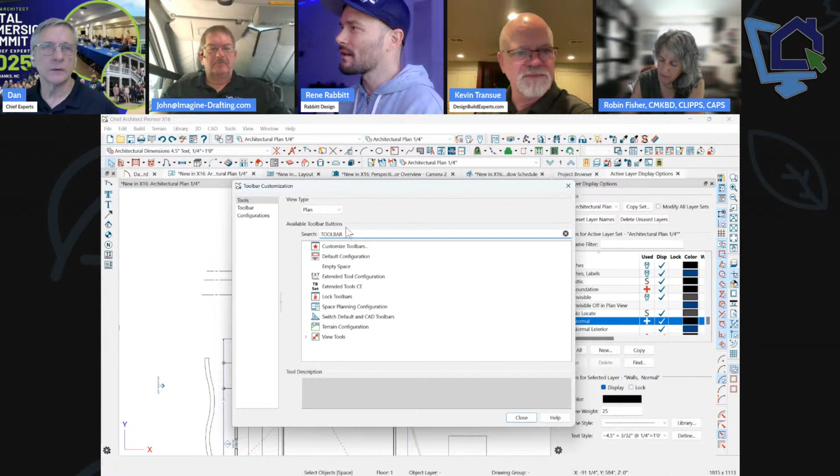Tool Search is what it's called. Yeah, not toolbar, tool, Tool Search. It would have been nice for it to be called that. There it is, Tool Search.

And we can add that to our toolbar. I'm just going to drop it on the screen here. And there it is, so I don't have room for it on my toolbar. Well, maybe I could, but I'm not going to put it up there right now. So there it is, so anytime I want to search for a tool, let's search for the roof tools, here's all my roof tools. Okay, so all my wall tools. You could search for walls just by typing in the name. That's pretty cool, yeah, this is a great one for people learning the software too.

And if you're using that, here's your teaser: can you then click on something in the list and have it take you to that functionality of that tool? Yeah, yeah. So wall hatching, here it's selected the wall hatching tool. Yeah, it takes you right to that.

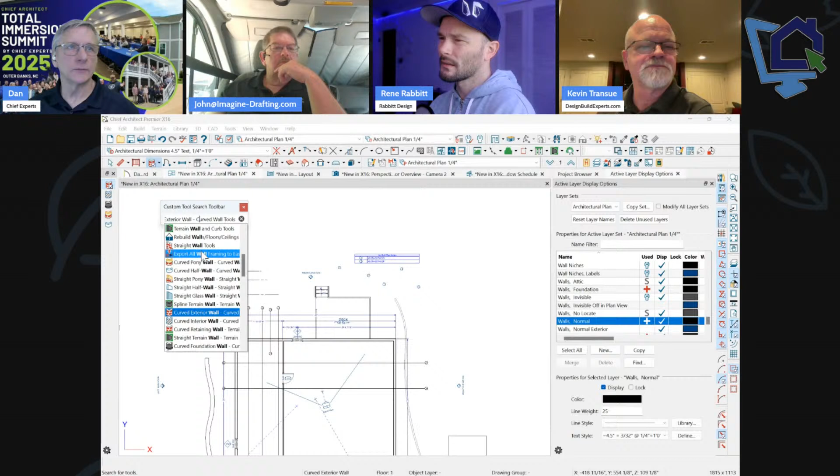Only if the item is available, right? Like wall break shouldn't work because we don't have a wall selected. Because I don't have a wall highlighted. So if we go back to that, no, it didn't do anything. But if I highlight a wall and then select wall break, then I have it available. In fact, it narrowed it down to only wall break when I selected a wall. Let me undo that. So if I select the wall, if I go in here and search wall, okay, now it gives - so I do have the wall highlighted, but it only gives me that, and it does work. Yeah, so it's live, a nice addition to that.

All right, space planning room boxes. We were commenting on this a little bit before. Yeah, if you right click on any icon, toolbar configuration, go to space planning configuration, you're going to get this. Chief has done some work on this where they got rid of their little wizard thing, which I thought - the wizard's gone. Yeah, so we can add all these different rooms. They hired a new developer that's working on this.

So now we can break these just like any other polyline box, which is nice. So you could reshape things, and it kind of shows you a little bit of where the walls will be. Actually, it does a really good job at showing you where the walls are going to be. Yeah, and even especially if you draw it against your existing building.

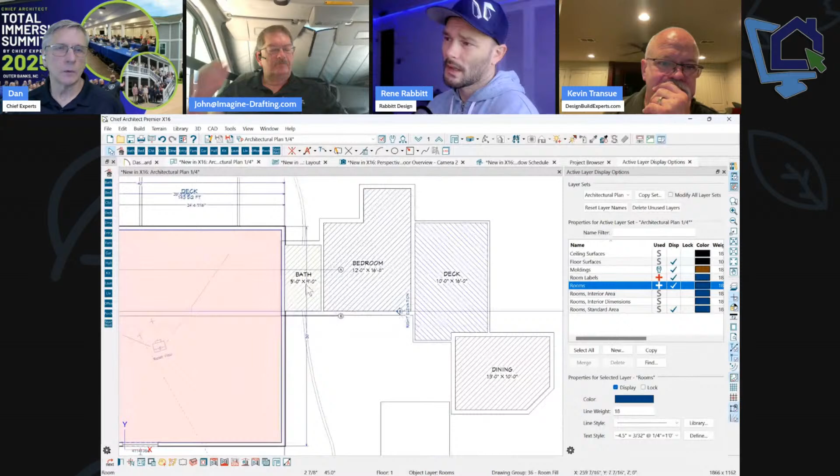Is that what you meant? Well, when you adjust the bath there, it will show how it's going to integrate with your existing wall. So there, I just put a garage in there, and it's integrating it into the plan.

So when I build the walls, I click this little wizard icon up here, this one with the little magic wand, that's going to build the walls. Now, once you build them, you're done. You don't have any more access to those boxes. You've just replaced those boxes with walls.

And I see it did not trim that out of there. I thought there was an icon to do that. That's just if you're doing space planning only. And you should show that too, because we can clip a box from another box.

But I thought it kind of did that automatically when we overlap. It does, but say you wanted to clip it going the other way, you can do that as well. Clip it so like if the shape entry gets cut a little bit as it overlaps the entry, you can choose one and have it cut the other.

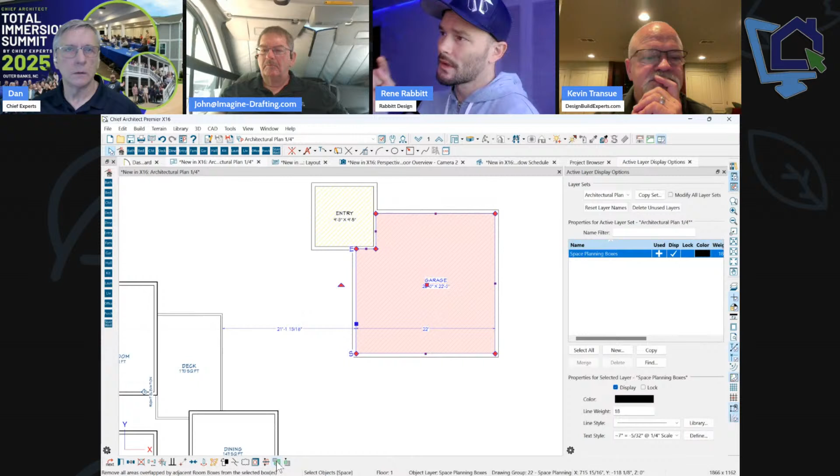Thank goodness for that icon down here. So that one actually just clips your active one to whatever is overlapping it. So now that one's shaped, instead of being square. But you could choose the entry one and have that clip the garage, and the inverse.

It's the second icon there. Yeah, it didn't do anything. You got to hover over another box then. Adjacent room box, but you've already done it, so it's not going to work in this case.

Let's try it again. Let's do office. And so if I hover this and remove overlap areas, it's the second one, overlap adjacent room. So you would choose the garage first and then choose the tool to overlap the office.

And now hover over the office. No, choose the garage first. Now use that tool, hover over and then click this. Yep, oh got it, we got to do it, it's a 2-action step.

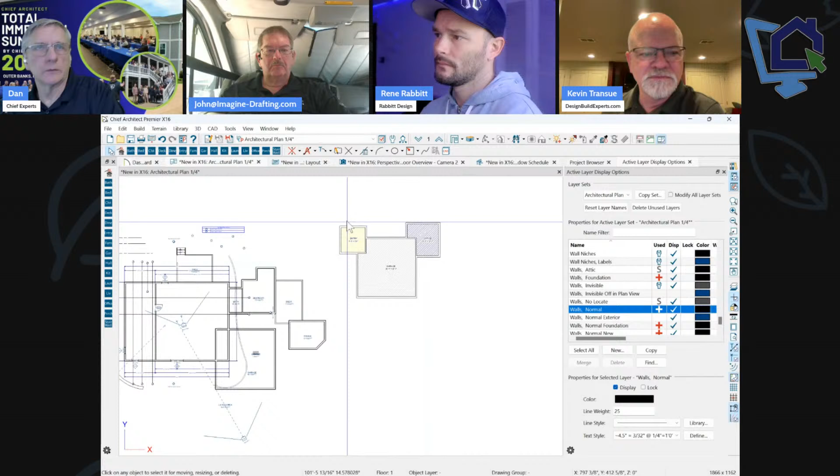Okay, got it. That's the same as the what are those tools they call them again? The union, subtraction. Exactly, those tools right here. You got 2 actions. All right, cool.

All right. Railing Newel spacing. Anybody like that new tool? What's this from Chad? What's he asking?

It'd be great if you could give a dollar to each space for programming totals. I think as you're laying out the space, if you could put some dollars to it for your budget. Or is that... I bet Rene has a macro for that. Yeah, that's what I was thinking. That sounds like macro territory. Yeah.

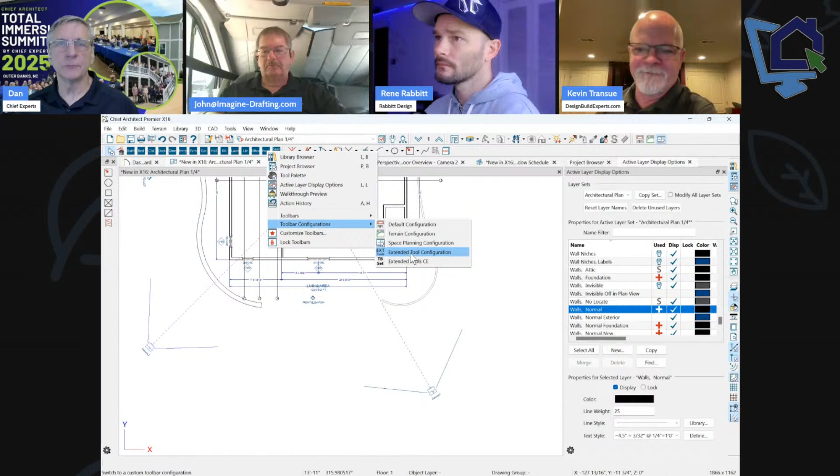Okay, all right, let's get back to our extended tool. And I've got a little deck drawn on here. So Chief has added the ability to customize where the Newels are.

So one of the first things I'm going to do, of course, I'm going to click on the railing, open its dialog. I'm going to go to Newels and balusters and uncheck use default and turn the fill style to no pattern. That's probably my template that's set up that way. Now I can see where all the Newels and balusters are in that railing.

And now when you click on a railing, you'll see a new icon down here, it looks like this, called Move Newels. So when you click on that, you can then click on your Newels and move them around in your railing, which is hallelujah nice. Yes.

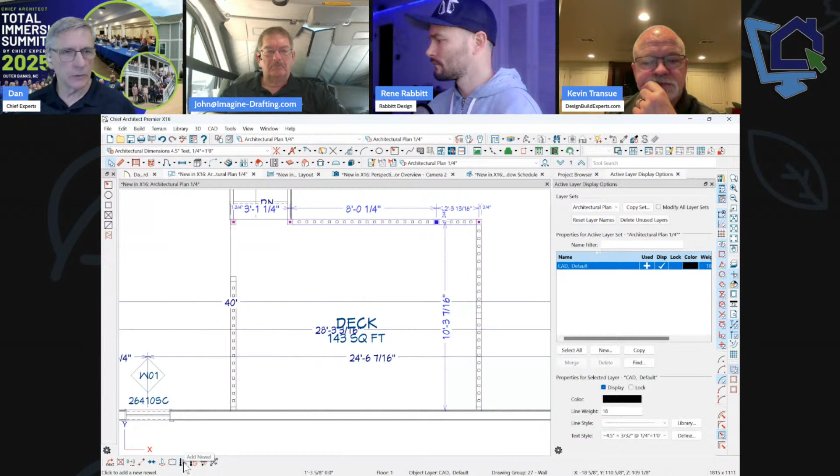So plus I could hit, so can I copy that one? No, I have to go add a Newel. Now I could go put more Newels in if I wanted to, and then I could put those wherever you want, so they'll dimension out nicely. It's just really a nice way to do it.

Now, what you can't do is have different kinds of Newels that you put in here. So I was wondering if I could have a situation where, whoops, goofy there. So if I could have a situation where I have a beam up here and a tall post here and then maybe a short Newel here, can't do that yet. Maybe next version, I don't know, but at least we can move them.

You can also do it just by clicking your tab key. There is a way to do it with a deck railing versus an interior railing, and overlapping them.

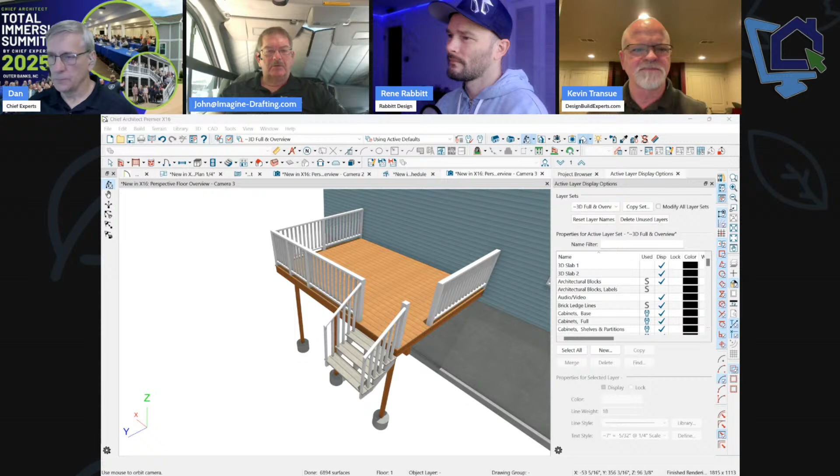Couldn't you just do that using a break wall tool and specify two different railing walls? I suppose, yeah, there's ways to do it. I was just looking for a nice simple way to do it within the same railing. So can you just add a newel randomly, using the same newels you'd use on the stairs, out in the yard? Like copy one and put it wherever you want it. You're just talking about a millwork symbol, just placing one. Yeah, but the railing won't change its spacing based on that newel. Right.

Mike, you do a nice set of plans, dude. Yeah, very nice, very beautiful. You the man. You put a lot of thought, a lot of care into your plans. That's nice. Do your builders need that much help, or are you just doing it to be kind? Mike literally does cut sheets from Chief that he cuts from. Literally cuts from, yeah.

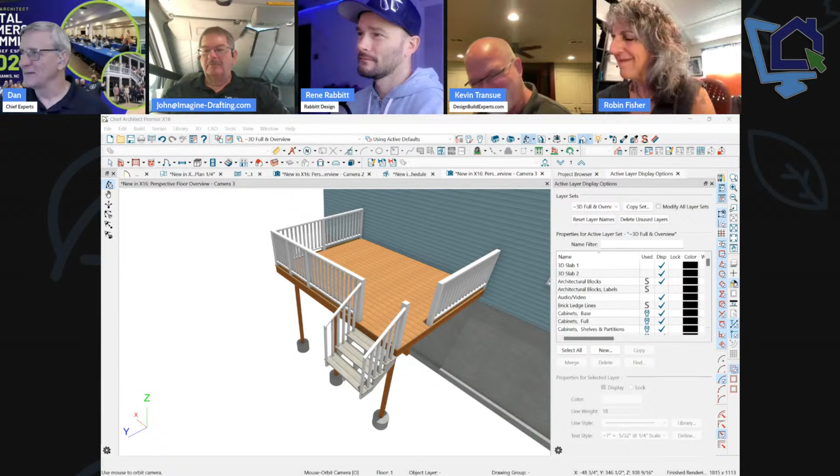Wow, guys, we made it to... 15? 16? No, we made it to 17. How many? We're out of time. We'll pick it up again next show. We're going to end up doing a couple more shows before we leave.

Before we leave, I have a question. Mike said I look like I'm in a what? I can't find it. A Maybach. What is that? What's a Maybach? I'm going to say something derogatory. That's like a rapper's car. No, the Maybach is a really high end... is it a Benz derivative or not? I'm not sure, it's an upper line though. Anyway, I'm in my van. Normally I have a fancy background so you guys can't tell, but I'm in my van today.

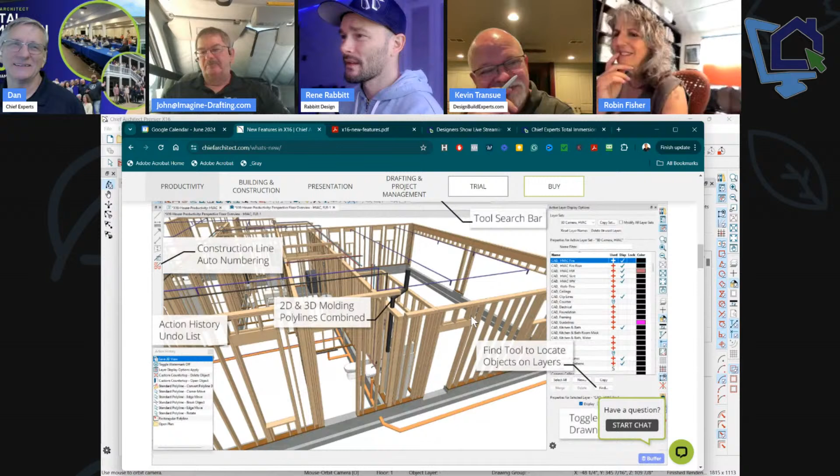It's just a plain van, a Ford Transit. With the protruding things and the strange angles, I thought it was a green screen, and I thought you were in the space shuttle or in space. He's in orbit right now.

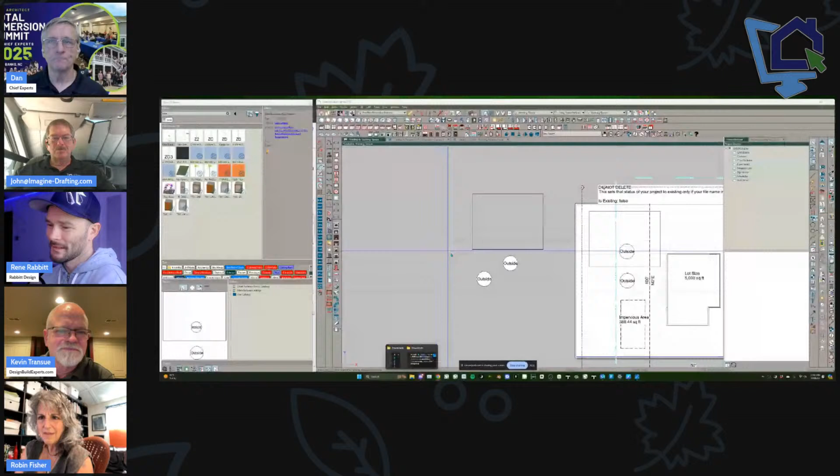I'm going to show you a little funny one before we leave. Talking about macros, we get some new capabilities and some fun things, but here's an example. I got a CAD box here, I got a note here. Watch this. It's inside of the box. It's outside of the box. And I can reshape the box. So you use that as a trigger. Think about that. Yeah, I love it. That's cool.